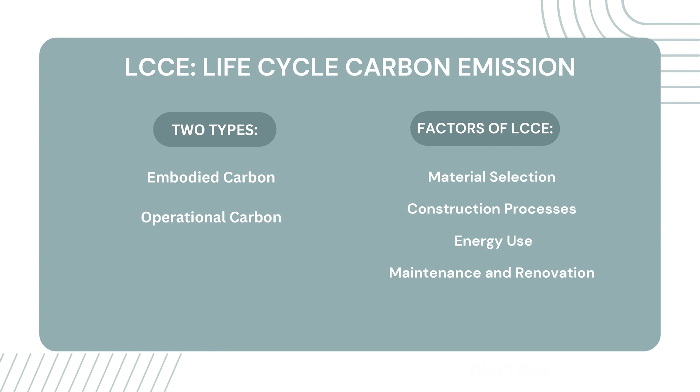Now we're going to chat about the factors of LCCE, things such as material selection. When you're designing or putting together the LCCE, the things that really influence it are materials, which ones you're going to use, such as concrete as well as steel. Today we're going to go into a little bit more depth about those two particular products, in addition to construction processes. These are high embodied carbon processes. Developing cement, developing concrete, actually goes into that as well.

Energy use, the operations of the building, that also affects operational carbon and also affects the life cycle carbon emissions as well. And then maintenance and renovation. Just the regularity of maintenance, the cadence of how often we're going to do it, and also the maintenance of the building. So we want to make sure that people really understand exactly what that means for the factors of the LCCE.

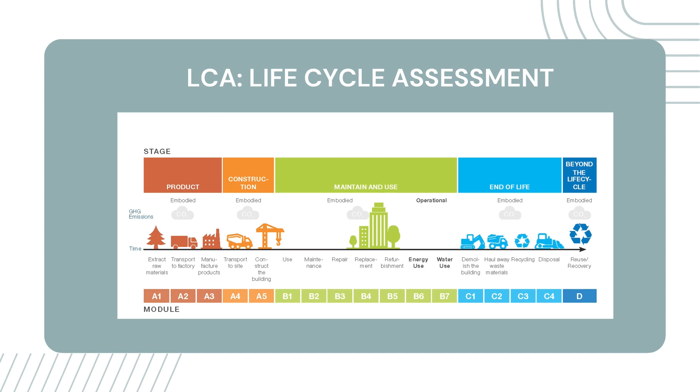Here we have the life cycle assessment. Life cycle assessment, LCA, as we all know, is essentially the systematic approach to how we evaluate the carbon footprint of a particular building in its life cycle. So we're going to start off with a couple of stages. Here we have the product, construction stage, maintenance and use, end of life, and beyond the life cycle. So essentially, we start from the extraction of the raw materials, the production of it, to the transportation, construction, and then we have maintenance and use, which includes embodied as well as operational carbon, and then of course end of life.

With embodied carbon, there's within and outside LCAs. Within LCA, we talk about raw materials and units and processes and things of that sort, in addition to the outside LCA. Outside LCAs are essentially things that we don't necessarily include in that particular evaluation, such as human labor, such as infrastructure. So we want to make certain that we're putting together an LCA that we're considering those items as well.

EPDs, Environmental Product Declarations. That's essentially third-party reports that we're going to use to kind of scale that as well, and make sure that people really understand and get into it. So you've got a couple of stages of LCA. When you're conducting the LCA, you've got the goal and scope definition. Here we want to try to establish some baselines. We want to establish objectives and goals. We want to make certain that there's baselines that we can set together.

Then we create the lifecycle inventory. Lifecycle inventory, essentially we're going to use our inputs and outputs of that material for the entire life of the building. From there, we go into the lifecycle impact assessment. So we're going to take the inputs as well as the outputs of that material, and we're going to put those together. And then of course, interpretation. We're going to take our inputs and outputs, and we're going to try to assess how can we improve upon the construction of this particular building, and also the environmental effects of the building.

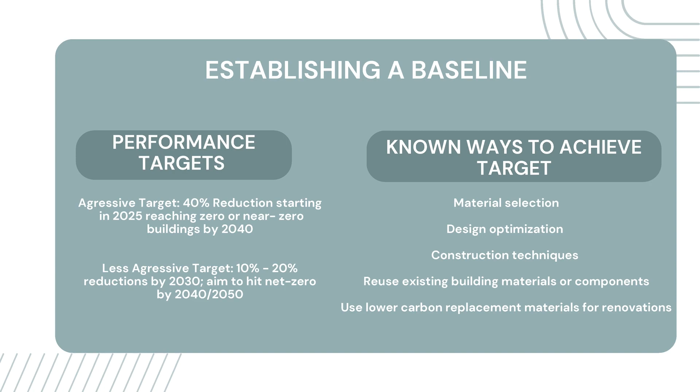Ways to achieve that target: material selection. When you're considering how to reduce the carbon footprint, you're going to look at certain things like concrete and steel. There's got to be other things that you can use. Design optimization, here's where you can engage with architects and try to figure out ways in which they can use fewer materials, construction techniques. This is another way to achieve that target.

And of course, consider weighing options of reusing existing building materials or components. And lastly, using lower carbon replacement materials for renovations. So that said, any questions regarding this?

Awesome. So I'm going to pass it on to Bob. I have a question for you guys. Does everybody understand what an environmental product declaration is? That's familiar. No need to talk about that again. Okay. Ken mentioned as-designed LCA and as-built LCA. Does anybody want to take a guess at what might be different between the two? What was drawn versus what the contractor did. Yeah. So the quantity of materials, right?

When you take volumes off of a BIM model, you're getting a pretty straightforward number. But when contractors order materials, they might account for waste on site. So the amount of material might differ. And for construction-related emissions, for the equipment, the fossil fuels burned on site, electricity used on site for the construction process itself, the simulation software has some placeholders. They don't know exactly what your contractor is going to do. So instead of zero, they have a per square foot default assumption.

And as Ken alluded to, there are a lot of stages and boundaries when it comes to life cycle assessment. And if you're not clear about where you're drawing the line, things can get pretty confusing. And regardless of where you draw the line, the amount of useful data available is still very low. So at least it helps to have clear stages and boundaries.

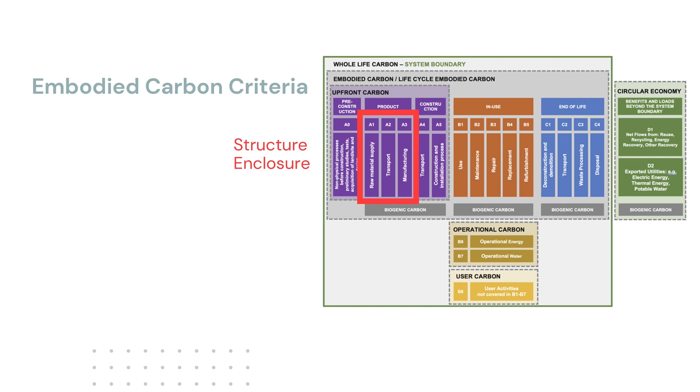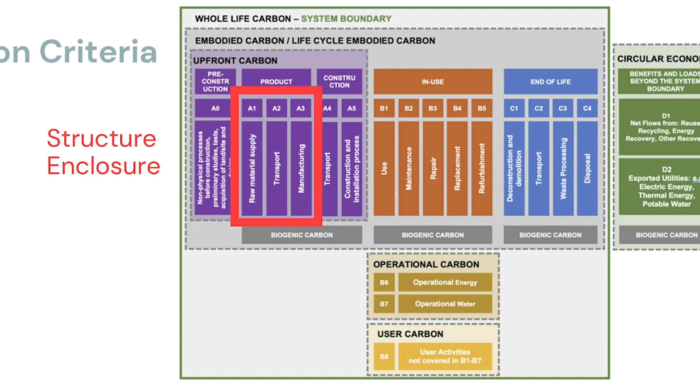So what we're looking at in this study is structure and enclosure only. We have some general recommendations for interiors, but that's what we're limiting the study to. And stages A1 through A3. We're not looking at the one before that, or transportation of materials, or emissions on site during construction. So as long as we're clear on that.

Any questions about this? So I'm assuming that was driven because those are the biggest contributors to embodied carbon, that you focused in on structure and enclosure, or how did you all decide that was the most important? Oh, for structure and enclosure, we'll get to that. You'll get an answer for that. But yes, that's why: they have the biggest impact if you reduce them. Anything else? A1 through A3 for the same reason, because the data available out there is mostly for that. Even in EPDs, that's what is available.

Okay, so now a baseline, right? We have to have a starting point, and it wouldn't be hyperbole to say the information available out there is just not good enough, right?

Carbon Leadership Forum maintains a database, so every time you do an LCA, you report numbers voluntarily to the Carbon Leadership Forum, and they collect all that information and say, okay, throughout the buildings available in the US, this is what a good baseline number is in terms of kilograms of CO2 equivalent per square meter. That's the unit we're using. And you can also call it embodied carbon intensity.

So on the x-axis of the chart is the number of floors in the multifamily building, and the y-axis is the kilograms of CO2 equivalent per square meter. So for 15 to 25 stories multifamily building, the baseline falls at 373, right? And based on my own project experience, I'm finding that if you build it to today's standards, business as usual, you don't try to reduce anything, you will end up about 10% better than that benchmark. So that gives you a baseline of 336.

Now again, based on information out there, literature, and my own project experience, it's safe to assume that 70% is structure, 20% is enclosure, and 10% is interiors. So that's our starting point in terms of looking at reduction strategies. Does that make sense? Why is there so much variation between the 7 to 14? Because that is a huge spread compared to the other building heights.

Yeah, so if you look at the legend, I'm sure it's not visible properly, but some are structure only, some are structure, enclosure, interior, some are structure, foundation. So the color of the dot, I don't have the legend here, I'm sorry. But yeah, again, the scope of the number is different. Is that related to the type of structure? Yeah, it's the type of construction. So at that kind of threshold, 7 to 14 levels in a building is where you're determining whether concrete or steel, it fluctuates a lot in that particular group of buildings. Whereas a high rise, for the most part, you know how much steel and concrete you're going to use every floor.

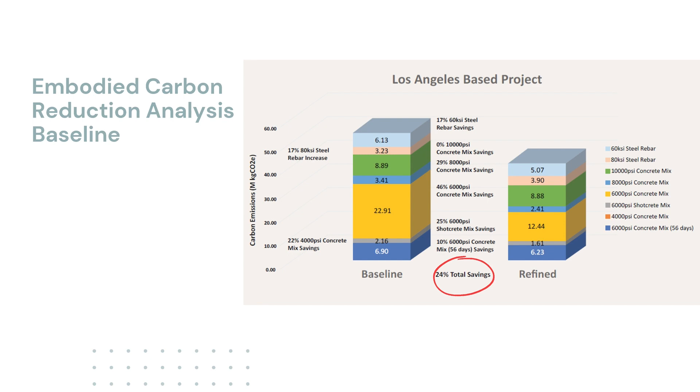So now, Denise and Helen tried a lot to find an actual BIM model, actual specifications that we can put through the simulation software and get information. In the lack of all that, we had to make assumptions on what is potentially possible and how much it would reduce things, and stick to that 70% structure, 20% enclosure, 10% interiors breakdown.

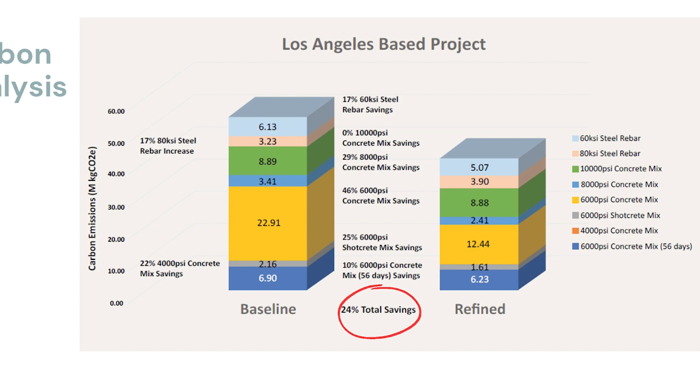And there is a case study on the National Ready Mixed Concrete Association's website of a high-performing multifamily project that took all the different types of concrete used in different locations of the building and the rebars and everything. They went all the way and reduced the embodied carbon by 24% of the concrete structure itself. So we said, okay, if 24% is the best case scenario, then maybe 12, 18, and 24 for good, better, best is a good assumption. And that corresponds with the projects we're seeing in terms of analysis.

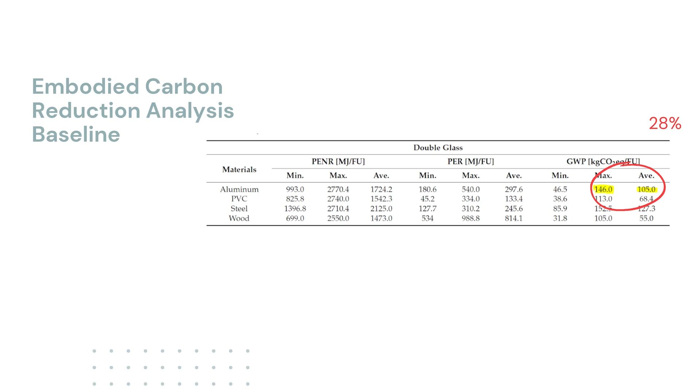So again, windows. So the majority of the enclosure of the project is windows, right? And we found one European paper, data is hard to come by, they looked at 116 EPDs or something of different frame materials, double glazing, triple glazing. They found that on average, the embodied carbon reduction for aluminum frame, double glazing windows was 28%. And so we said, okay, if 28% is the best high performing level, then 14 is good, 21 is better, and 28 is the best. So that's how we came up with those numbers pertaining to structure and windows. Does that make sense?

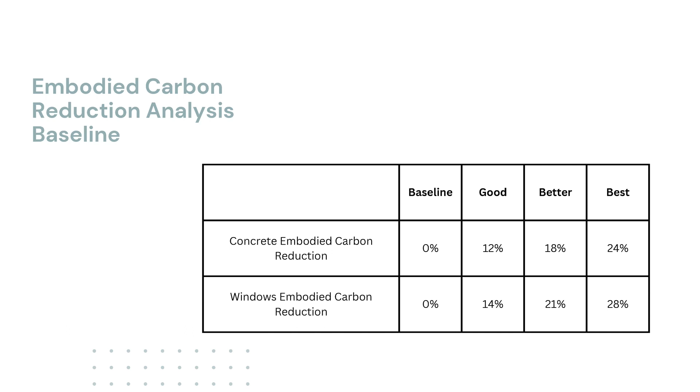So the next thing was to take the baseline and apply those reduction percentages to the weighting. So the concrete numbers would apply to 70% of your baseline, the window numbers would apply to 20% of your baseline. And because there's no interiors, there's no line item for interiors here. But when you take that weighting into account, you get a good, better, best of overall performance of 11, 17, and 22. So if you try not too hard, you can hit 11% with relative ease, a little more effort, 17%, and best case 22%. And that again corresponds with what we're seeing on projects.

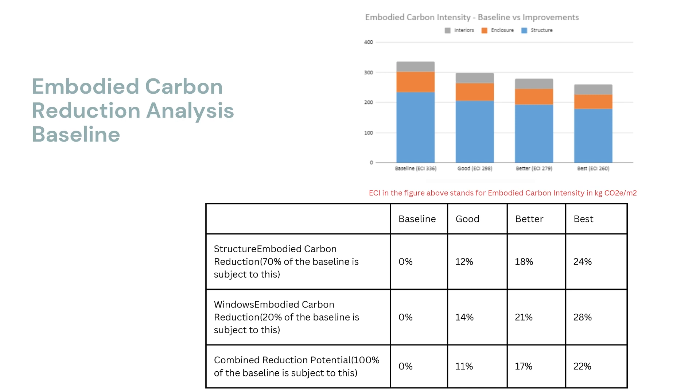Does this make sense? The blue in the chart is concrete, orange is enclosure, and the gray is interior. And that's during construction? The percentages, it's materials? Yeah, for construction. Are the same percentages after construction for the lifespan of the building for residents when it comes to energy consumption and carbon? So we're only looking at A1 through A3, which is cradle to gate. The materials get extracted, manufactured and come to the site. That's all we're looking at. So it's like holding all else equal. Correct.

At the best case scenario, you could get 22% reduced embodied carbon by using some alternative design, alternative materials. That's the best case scenario based off of the research that we did. So if you do a 22% reduction and you deliver your building, and then the tenants within that building use an insane amount of energy, that probably is going to erode some of the overall life cycle embodied carbon reduction of the building.

That's a good point there, because initially the focus was on operational energy, right? But you're doing net zero operational energy, and now your embodied carbon has become a huge piece of the pie. So, does that make sense?

Absolutely. Okay. I was just looking at whether the design and the material matter not just for the construction, but also that there will be some long-term benefit so residents will pick, I want that contractor because they followed through for the lifespan. So there is a benefit, not just from the construction side, but for residents to pick which contractor.

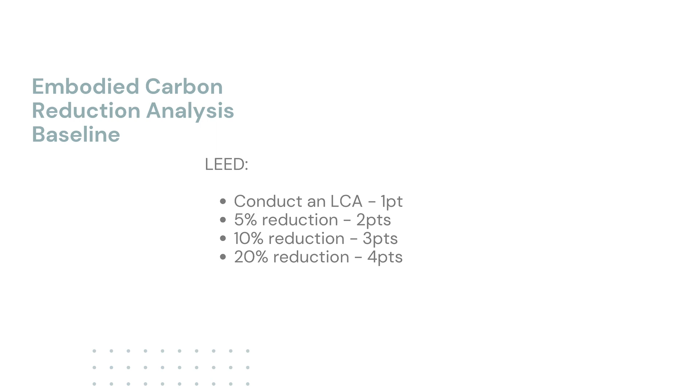Thank you. Okay, so now we went to the LEED language and said, what is LEED saying? How does it compare to what we're doing? LEED version 5 is changing a lot of things. LCA will be a prerequisite if the current language holds true after the comment period. But if you conduct an LCA, you get 1 point. This is very simplified, the language is too complex. But if you get 5% reduction, you get 2 points, 10% reduction, 3 points, and 20% reduction, 4 points. So, roughly aligning with that.

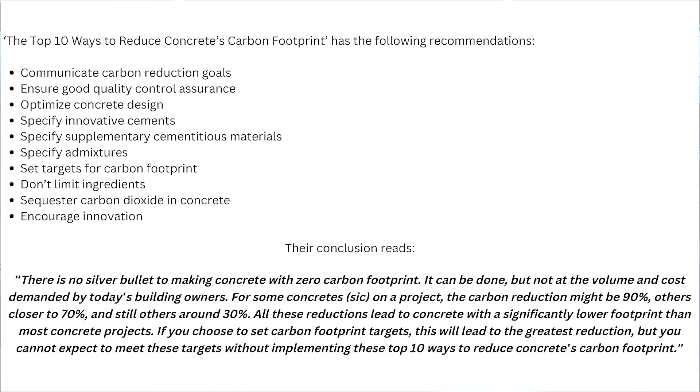And so, my personal takeaway from all of this is, if you can do only one thing, do the structure and the concrete. And this report, which had the best performing case study that we drew on for the numbers, has a list of things they want you to do. I'm not going to read all of them, but you set goals, you communicate the goals to everybody, and you go do your research. Like we were talking about, Claire is an owner rep here, so if the owner comes and says, do what you need to, I need 20% reduction of embodied carbon, people get it done. You can do everything, but if you don't do these things, you may not be able to hit your target.

That's the end of my section. I can field any questions you may have. And all the research Ramona did, and all the charts and their explanation, we actually have a report that we're sending to you, Denise, so you can distribute it to whoever, so it has all the research organized.

Okay, so we talked about this the other day. You mentioned structure, right? Deal with the structure, and you're getting really far along to reducing the embodied carbon. Other parts of Atlanta are looking at reusing existing buildings, right? Even just the whole conversation about office to residential or office to something else, for different reasons, to revitalize downtown or whatever. We talk about it from an affordable housing standpoint, but there's also a really big benefit for reusing existing buildings from an environmental standpoint. You just said it, right?

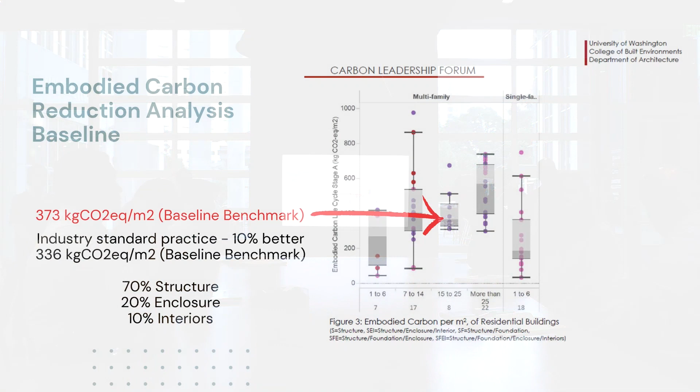I think use comes into that too, because during the tour we also talked about the complexities of using mass timber for residential, thinking about program elements. So if this is focused more on residential, it doesn't really lend itself currently towards that type. I actually had a question back when you were looking at the chart and the number of floors. When you're talking about multifamily, I was thinking maybe a 3-story, but it looks like it starts at 7 stories. Was that thinking right?

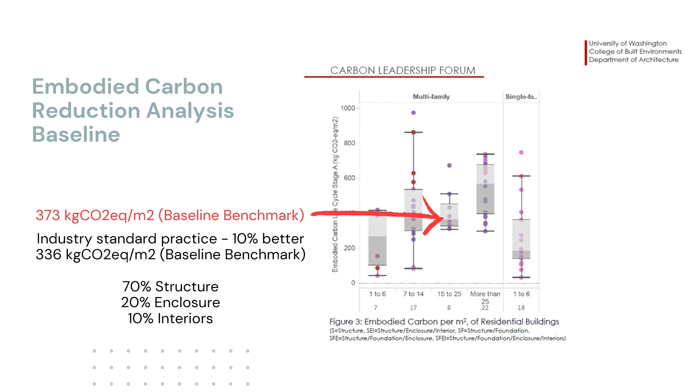That's specifically what we're going to see in Buckhead, and the land values are driving that towards the higher end. It's probably hard to read, but that's your plain timber, 1 to 6 stories. So that's your 5+1. I was thinking normal stick-built, like those apartments over by Roxborough. And then I was like, wow, these are going to be more like the condos up here. This presentation was for Livable Buckhead, it would have been 1 to 5 story. We wanted to measure what they care about most for the future.

And just to quickly circle back to the mass timber discussion, even mass timber buildings will have a concrete foundation and some support steel structure here and there, so it's still important.

Okay, so my section in the presentation was to research and to recommend very, very specific things Livable Buckhead can discuss with developers, multifamily high-rise developers, on reducing their embodied carbon. So I took basically all of Romana's research and then tried to not only understand what are the biggest bang-for-your-buck design and material selections that they can do, but also how much does it cost and is it available.

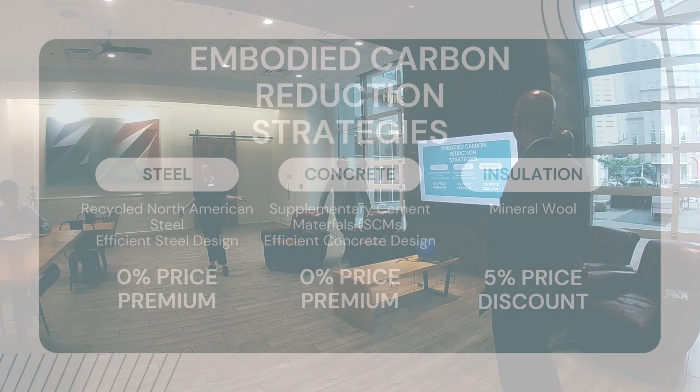So the first one, and I know there's a concrete expert in the room, so just know that I am not a concrete expert. If you have some really good insight, I'd love to hear it. But I'm going to start with steel. Steel is one of the biggest contributing factors to a building's embodied carbon and global warming emissions in general in the world. So that was a big one we wanted to talk about. And through my research, there were really 2 things that kept coming up every time I read about steel and reducing its embodied carbon.

The first is encouraging developers and general contractors to use recycled North American steel. That's actually pretty common already. It's not that people say I want Chinese steel or I want steel from Canada. We tend to use that anyways. So it's really just encouraging them, that's our standard. If you can get recycled North American steel, that's going to have the least overall embodied carbon because we're recycling it. And it's pretty market standard.

The issue is the availability. So in times like 2020, 2021, when everyone's building, they tend to run out of the recycled steel and they have to pivot and actually create new material. So there's a little bit of a market availability issue, but overall, using recycled North American steel is not only already standard, it's not a price premium at all.

The other thing is just efficient steel design. This is a huge one. I work with architects and structural engineers all the time, and one of the things I regret every single time we go through the design phase is I don't get the structural engineer on board early enough. Usually what happens is the developer will bring on their architect, they will plan out the building footprints, decide how many stories it is, get through a schematic design phase, and then they bring in their structural engineer to make sure that the building is going to hold

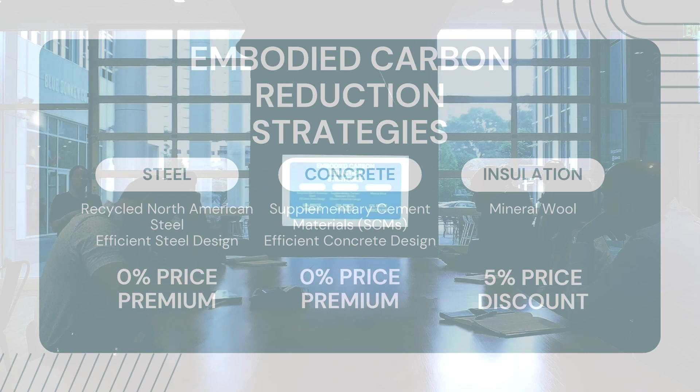Concrete. So very similar to steel, we have two recommendations for this. Instead of using 100% pure concrete mix, using supplementary cement materials can help, whether it's fly ash or something else. The good news is that's pretty market standard. So encouraging people to use supplementary materials while they're deciding whether it's foundation or podium or whatever is a good way to see that reduction have a very easy impact.

And then very similar to steel, just an efficient concrete design. Making sure that the structural engineer is not over-engineering the concrete design within their building. Honestly, it's the easy button. It's usually just over-designing something, and so concrete is very similar to steel in that that's the easiest way to reduce that. And 0% price premium if you have an efficient design. It actually usually saves you money. So. Quick question on that.

I've heard that there are challenges with using supplements to cement with cure times and things like that that are cost drivers in the project. What's the reality of that? I'm curious since we have the concrete guy.

Sort of, kind of, maybe so. That's a really good definitive answer.

There is truth in that. Fly ash, for example, you will get a slightly slower strength gain. Is that bad? Not always. And that's just because of the way fly ash works. Cement and water react and it sets up fairly quickly. And then fly ash actually reacts with one of the byproducts of that, so you have to wait until that byproduct is formed.

And then as it gains strength, generally speaking, it's a little bit stronger. But that depends on what your element is. Can you afford to wait 56 days for an element to set? In some cases, absolutely. In some cases, not a chance. And so when you look at an overall project, that's the balance that you do. Do I have to have this quickly on my walls? Yes. Can I afford to do it a little more slowly in other elements?

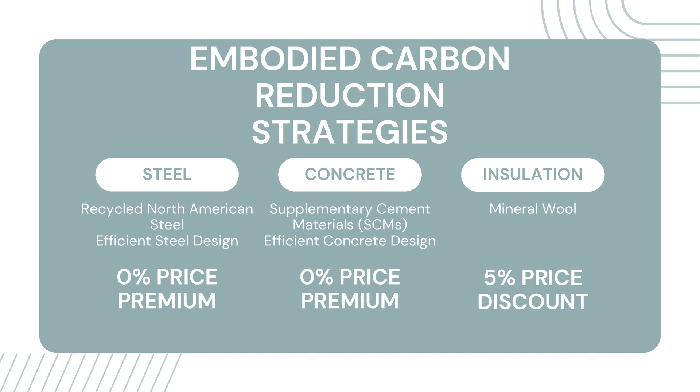So blown-in insulation is probably one of the worst environmentally non-friendly materials in the world. And so one thing that has really been starting to get used is supplementing it with mineral wool, which is a more natural product. And it actually is cheaper than just full blown-in insulation. Granted, I interviewed 2 general contractors for all of this price data, so that's based off of their current pulse on the market. Again, all that can change in 6 months, but I thought that was a really easy button thing to recommend.

Windows. So Romana talked about windows quite a bit. The window world was probably the hardest thing to get good data on. Overall though, reducing the use of aluminum double glazed windows seemed to be the most industry standard recommendation. Now, usually that research was saying just use wood windows. We can't really do that on most high-rise buildings, so that wasn't the most helpful thing, but there's quite a few different alternatives to the aluminum in our report, but for high-rise specifically, it was really difficult to find a silver bullet suggestion on that one.

One thing that I found really interesting from the 2 general contractors I talked to is, windows are already a huge expense, especially in high-rise, and so for most of the things that we discussed, they said, if you're going to go out of the box, assume a price increase. It's really hard to peg the window prices right now, but overall you should assume a 5 to 10% price premium. Are all of these windows presumed to be operable?

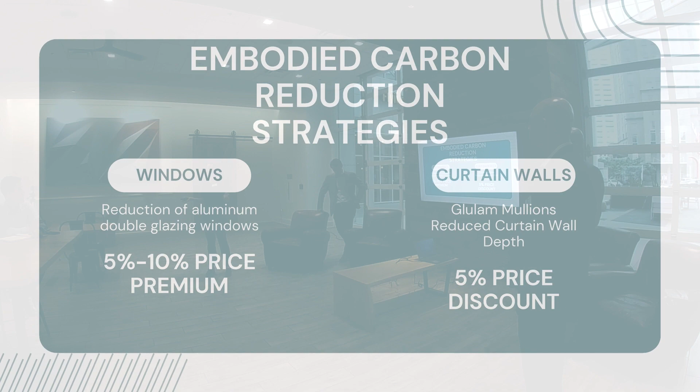And then lastly, the curtain wall, I thought this was really interesting. This actually came from a general contractor who's doing this on a building they're building for Georgia Tech in West Midtown. They're doing a lot of embodied carbon reduction in that building. This one I had actually not seen in any of the research. Maybe it's a new technique, but they are reducing the depth of the aluminum curtain wall from 7 inches to 4 inches and then supplementing it with glulam.

So not only does that reduce the amount of aluminum that you're using, but the glulam actually provides some structural strength as well, which means that you can also reduce your steel and concrete in the building. So I thought that was a really interesting one, and it's cheaper. So that was probably my favorite.

Can you explain that a little bit? So you're saying they have glulam on the interior of the curtain wall? So then you need to finish it, is it exposed? I don't know. Okay. I'm just thinking extra cost. He sent me a detailed drawing, and I was like, I can't read this. I'm a dumb developer, I'm not an engineer. Is that text right there? What? Is that text right there?

Yeah, it is. If I may quickly add to the windows and insulation discussion, when you go from double to triple pane, you will save a lot of operational energy, but you're increasing the embodied energy. Insulation is the same, you're increasing the insulation, you'll save operational, but the embodied energy goes up. There is growing awareness that that's the case, and I've seen projects where triple glazing windows were abandoned for that reason. They were not saving as much as the upfront penalty.

And then on the insulation piece, mineral wool has a lot of other benefits outside of the carbon. It's a naturally fire retardant material. It's stable if it gets wet. It's just required after a certain point, like 6 floors up, if you have metal panels. And you just have to plan for a little bit extra thickness for a given R value. That's all. So that was it. And then in the report, there's even more detail on recommendations for you guys to have a conversation.

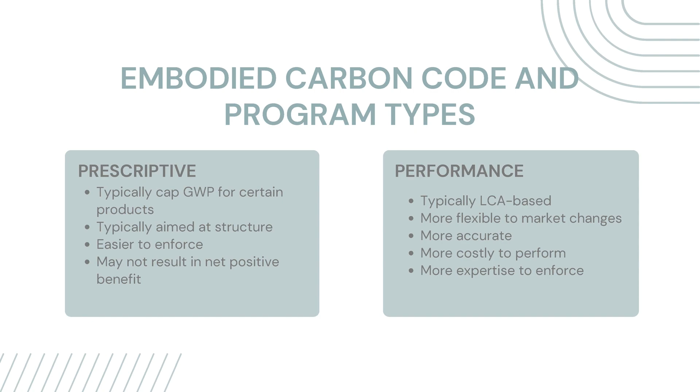They're also more costly to perform. It takes money to do an LCA. It's like getting a LEED certification. It's not free. It's not that much money, but it does cost money. And it takes a lot of expertise, which is part of why it takes money. You have to find those experts, pay them, and more expertise on the enforcement side.

So the typical cost for the LCA of the overall project, is it like a percentage cost? I don't know. It depends on the boundaries you set. Yeah. Like 50K, 25K? What's a ballpark? Again, I can't. It's hard because you're doing design assistance, and then at the end of design, and as built at the end of construction. So it really depends on what all you want.

Because I'm on tape, I can't commit to them.

This is just a high-level survey. I meant to back up. There's a third category, and Shauna dove into this earlier. I didn't put it up here because we're not talking about it a lot, but the third category is exemption, which is usually based in building reuse. And I'll talk a little bit about CalGreen. They basically have 3 buckets. Getting exempt is one of them. Most of those are through, if you reuse a building, that's enough.

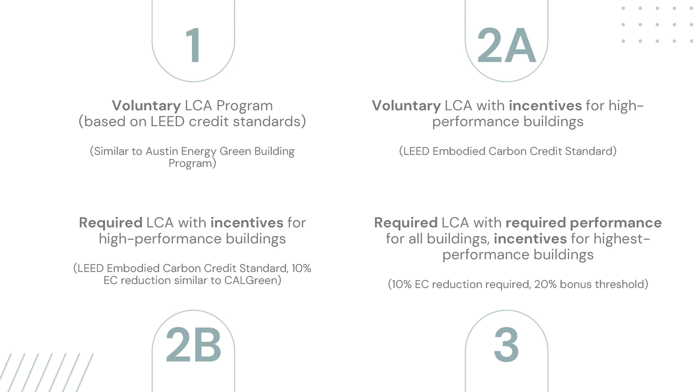And then the fourth phase would be everybody's required to meet some base level of embodied carbon reduction, and there's an incentive for those highest performing buildings moving into that best category. If you can hit that best category, then you can still keep those incentives. So that was just me sitting up late at night. That was my idea of how this might roll out over the next 5 to 10 plus years. What do you guys think, does it match anything?

Sorry, I have a question, because I remember from last year there was a conversation that Livable Buckhead can't really create a policy like this, right? Yeah, we can. You can, okay. We have to go through the city's process.

Right, through the city. So that's where I guess I was going with all this. Yep. All the examples you gave, a county, or a city, or we're talking about a district within a city. So we can drive it. Yeah. And this is how we do it for these districts already. The creation of the SPIs actually was a local community-driven effort, and then we get that legislated through the City of Atlanta.

So we would propose changes, text amendments, map amendments to the SPI districts, and then we would work that through the appropriate channels to get it codified. Because I know there are a couple SPIs right around here. So do you see that as the path? Absolutely. Okay. And you guys take this on similar to the Better Buildings Challenge, with the whole energy side. It's the same kind of approach.

They started with the voluntary program that was just a challenge and lots of hype, ooh, you get prizes and recognition. That came down from the federal level, so that was helpful for us. But going from that voluntary, then they started the reporting requirements, and then moving into the next phases would be more reductions and things like that, requirements.